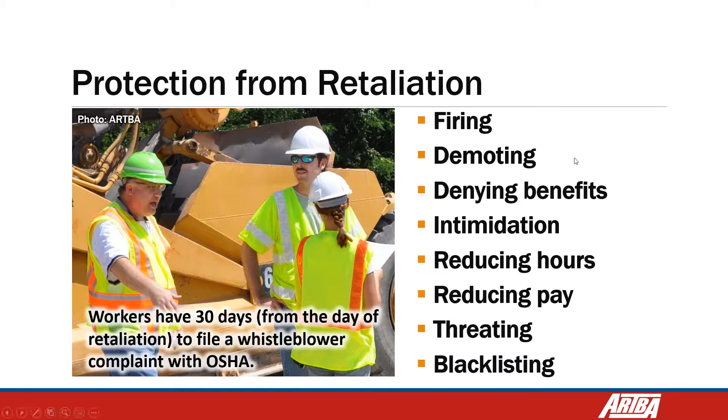Okay, so in general, we have 30 days after you know about the retaliation. Sometimes, for example, they reduce your paycheck, and you know about it just when you receive your paycheck. So you can say, hey, my 30 days begin from now, not from the first day of the month, but from the day you know about the retaliation. You have 30 days to go to OSHA and present a complaint.

How can you file a complaint? People can do it very easily now. We have all these electronic tools to do it. You can visit your nearest OSHA area office, but easier, you can go online and file a complaint online. So information is power.

When I am doing this class with workers, I ask them, hey, do you have a cell phone? Yes. Please browse 'OSHA complaint,' okay? They are going to find all the instructions on how to make a complaint before OSHA. So it is going to be much easier to go online.

They can get a form, fill it out, and fax it to your local area office. You can mail a letter to your local area office, or you can simply call OSHA. This is the way in which a lot of people are making complaints now, just making a phone call.

But workers need to be ready to provide all the information about the problem they are talking about. Inclusive, the OSHA inspectors are asking workers, did you talk with your company about this? Did you try to solve this problem with your company before? Because they don't have a lot of inspectors, and sometimes they say, look, we are going to visit your company around 3-4 weeks, and you are trying to have a solution immediately.

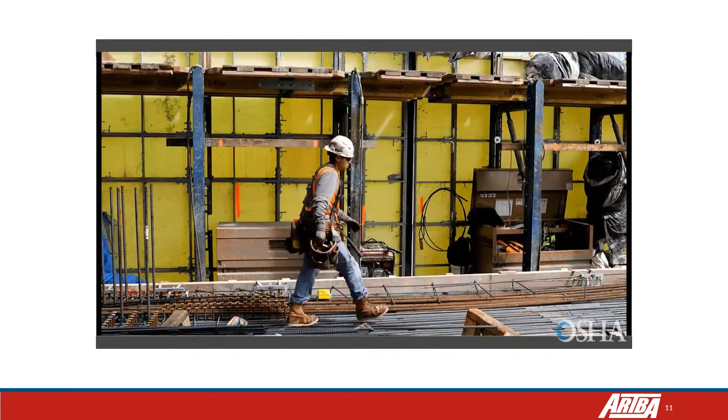A safe workplace benefits everyone. OSHA uses both enforcement and compliance assistance to achieve this shared goal. Ensuring compliance with OSHA standards is an integral part of the agency's mission to keep workers safe and healthy. That's why OSHA is working to give employers the knowledge and tools they need to comply with their obligations and provide safety information to workers. OSHA's on-site consultation program offers no cost and confidential assistance to small and medium-sized businesses.

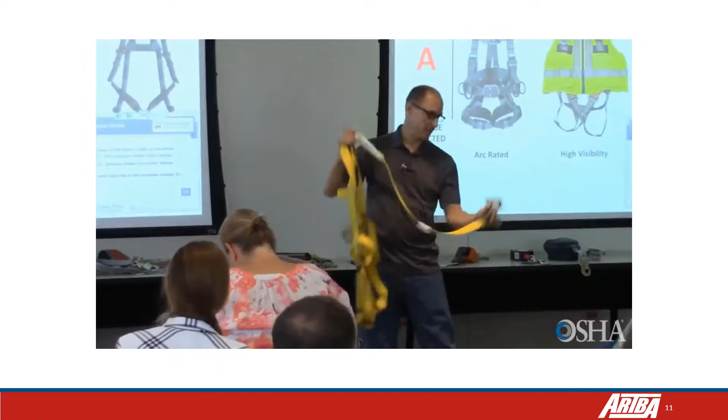The program helps businesses identify workplace hazards, provides advice for compliance with OSHA standards, and assists in establishing and improving safety and health programs. OSHA Training Institute education centers also offer training courses designed for workers, employers, and managers on safety and health hazard recognition and abatement at convenient locations nationwide.

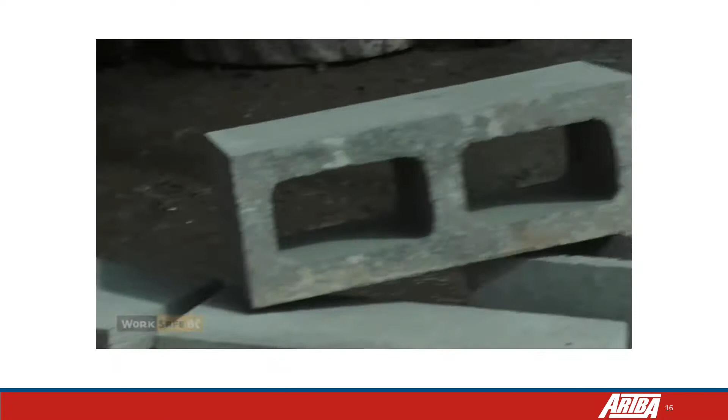Silica. It's one of the most common substances on Earth. It can be found in materials like sand and rock, and building products like concrete and brick. When a worker cuts, grinds, or drills materials that contain silica, dangerous crystalline silica dust is released into the air. As the worker breathes, silica crystals flow into his mouth and nose and down the air passages deep into the lungs.

The tiny crystals enter the small, fragile air sacs, where oxygen is absorbed into the blood. Immune system cells, called macrophages, engulf and try to dissolve the crystals, but they are unable to. Over time, more and more crystals build up inside the macrophage cells.

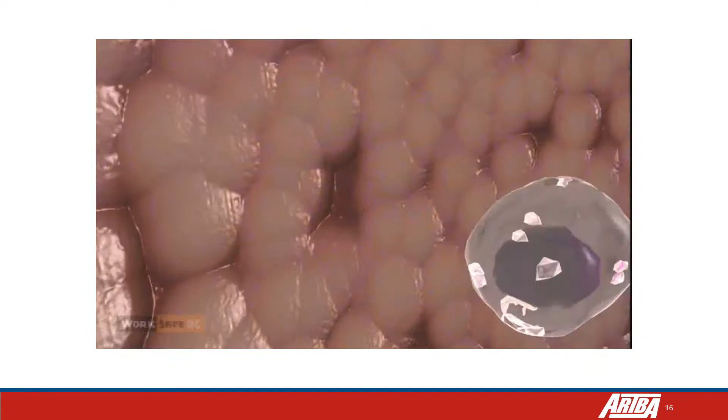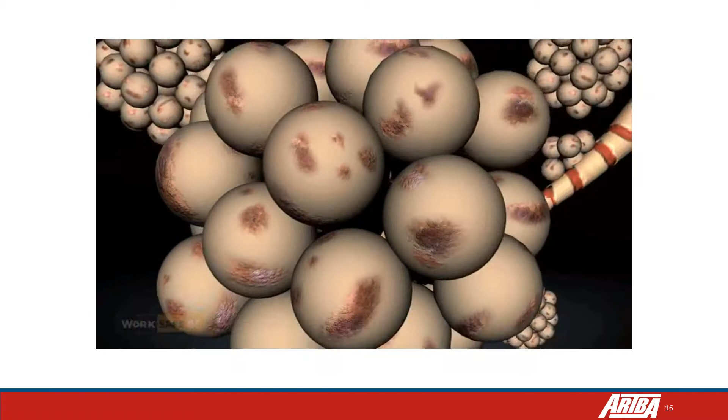The macrophages carry the silica into the walls of the lung, where they die. Scar tissue forms around the dead cells and spreads as more cells die. This damage can continue even after the exposure to silica stops. Eventually, so much scar tissue forms that the lungs can no longer function.

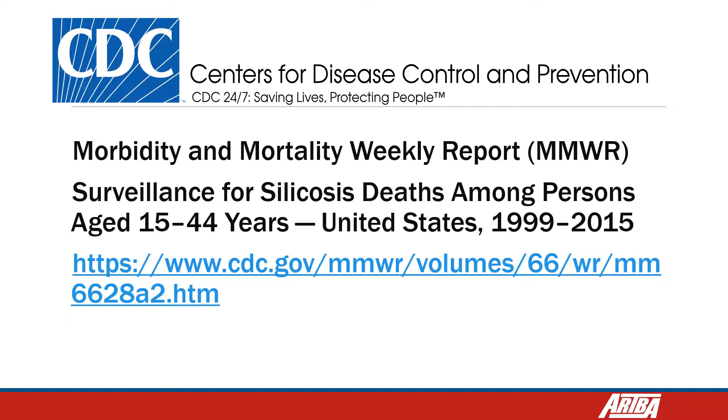So we are going to watch another video about the story of silica protection in general, and how we arrived at our current OSHA regulation. But it's interesting that people knew about the problems with silica for centuries, and we didn't have any specific norm or standard to protect our workers. Just in 2016, we got an effective standard making it mandatory to provide some protection that we are going to learn in this class, to prevent silica, silicosis, and all these illnesses related with silica. So this is the video I was talking about. It was produced, created by OSHA itself, but it's going to help us understand what was the process to create this current regulation.

Hello everybody. I'd like to describe a historic occupational health disaster that significantly affected workplace safety and health regulations. It's a story of silicosis at the Hawks Nest Tunnel near Gauley Bridge, West Virginia, in the late 1920s.

West Virginia is absolutely beautiful. Rolling mountains, fast-moving streams, and great windy back roads for motorcycling. But at the industrial level, the images are of chemical plants, coal mines, and mining disasters. But this story is not about chemicals or coal, but about workers drilling a 3-mile tunnel to expedite water flow for hydroelectric power.

Gauley Bridge is where two important rivers, the New River and the Gauley River, converge and become the Kanawha River, the lifeline of West Virginia. The Kanawha ultimately flows into the Ohio, Missouri, and finally the Mississippi, so it's an important transportation vehicle for coal and chemicals. Drilling a tunnel through Hawks Nest Mountain was especially dangerous due to its high crystalline silica levels. This, together with a poorly ventilated work area and no worker protection, produced a formula for disaster.

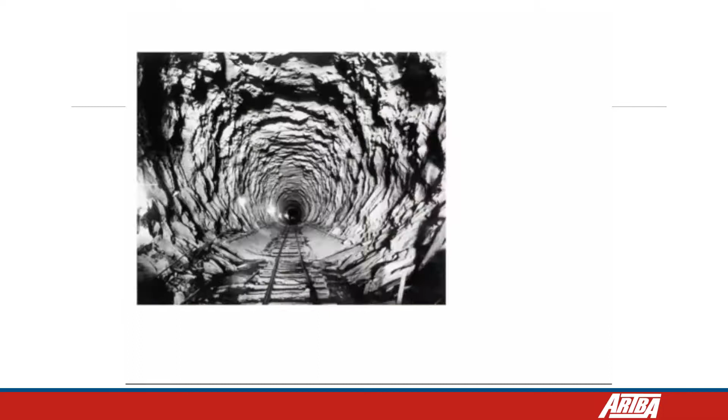You can imagine the high levels of dust in a tunnel like this. While many quote the number 476 that died, it's likely that hundreds more died years later. About 75% of the 1,500 miners recruited to drill the tunnel were African Americans, brought in from the Deep South as non-union workers. The workplace disaster at Gauley Bridge is especially poignant in African American history.

Of course, you know silica or silicon dioxide as sand. Approximately 12% of the Earth's crust is made of silica. So how can this be so toxic?

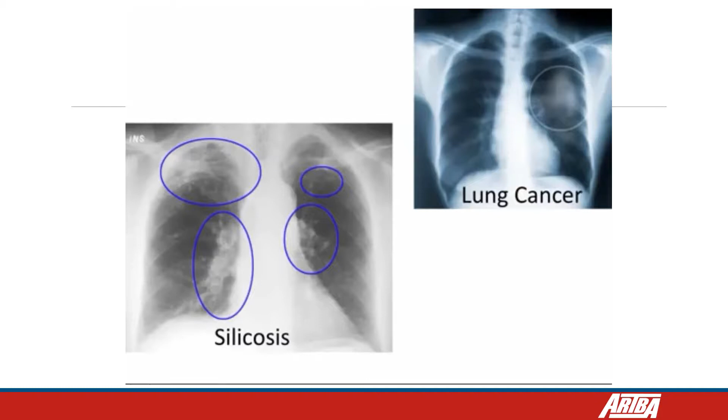Well, silica is complicated. Depending on how it was formed in nature, it can either be amorphous or crystalline. The toxic form of silica is crystalline silica. You probably heard of the most common form called quartz, but there are others, namely cristobalite and tridymite. These three are all associated with what's called silicosis, a fibrotic disease of the lung. However, crystalline silica is also a confirmed human carcinogen causing lung cancer.

Concrete is a mixture of sand, rock, and the binder of cement. There is often crystalline silica present. There may be some crystalline silica in the sand or rocks used for concrete, and when this is ground, chiseled, or drilled into, a fine dust will be generated.

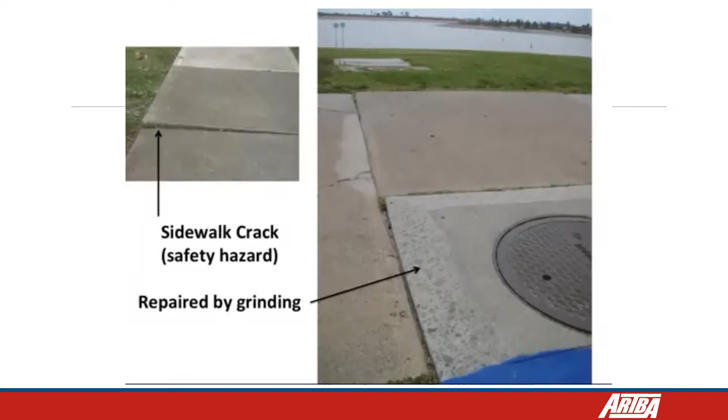What's common in many areas is grinding down sidewalks to remove a tripping hazard. I've seen many of these operations, and they all create large amounts of respirable dust. Wet methods or vacuums should be used to protect workers, but often a flimsy paper respirator is used, and sometimes nothing at all.

This is especially true of small-scale construction companies. Walk the streets in any city, and you'll see workers grinding, drilling, cutting concrete, granite, stone, or cinder blocks. This doesn't mean they're exposed to dangerous levels of crystalline silica. Exposure is a function of percent quartz in the stone or concrete and the particle size being generated, so while these images may seem risky, it's possible there is little or no crystalline silica in the air.

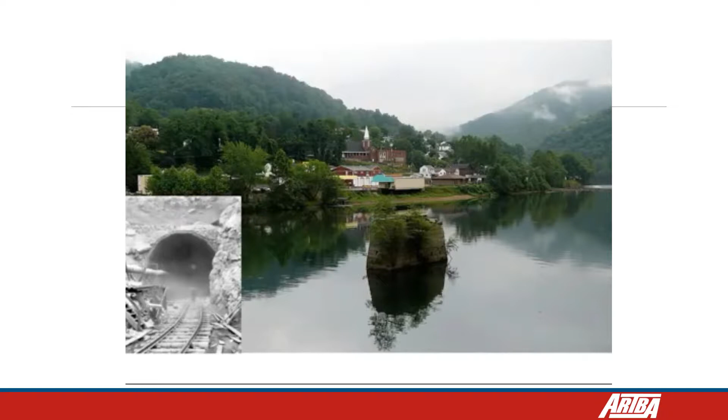But the workers at the Hawks Nest Tunnel near Gauley Bridge, West Virginia, weren't so lucky. They were drilling into very high quartz-containing rock and suffered the health effects. So when you're visiting beautiful West Virginia, stop by this area and visit the memorial for the hundreds of workers that perished in one of the most deadliest workplace poisonings in U.S. history. Thanks for listening, goodbye.

I'm going to... there is another video I want to show you. I'm going to show you later about the process of the creation of the law. But at this moment...

So it is real. People don't realize sometimes how bad this is, because the effect of the silicosis contamination, you can see it in 10 years, 15 years, and sometimes people cannot relate it with the job activity they were doing some years ago. So sometimes it's difficult to identify what is the cause of the silicosis, and you can find it difficult to create a legal case to prove that you were working in a place exposed to silica and these guys are responsible for your illness.

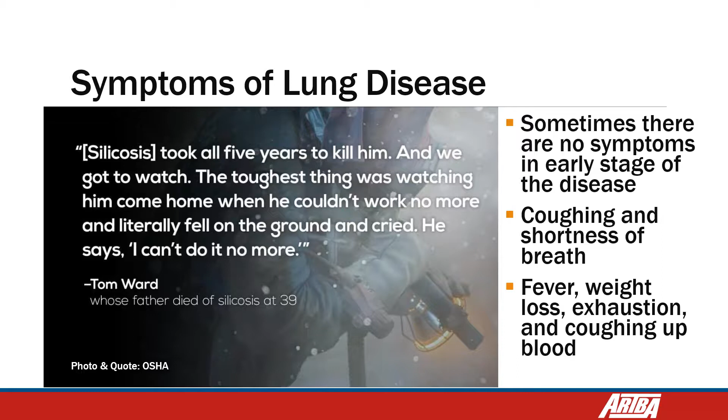But as I told you, in general, people cannot survive without an oxygen cylinder going everywhere with this oxygen. They cannot work, they cannot do anything because they don't have enough oxygen to move their body, and they are there waiting for that time to die, because it doesn't stop.

Silicosis continues growing and growing. Inclusive, after years you stop the exposure, you continue having silicosis and it continues affecting your body, and the scars continue expanding in your lungs.

It's calculated that over 500 construction workers are believed to die from exposure to silica dust every year. So we are talking about a big number, really, for construction in general. But the problem is that sometimes workers cannot identify where or what activity or when, or the company that didn't protect them, and they cannot make a legal claim.

It's difficult sometimes to identify where the contamination happened, or maybe the worker was working in several companies, in several construction companies, and it is difficult to say in which one you have the contamination, or maybe you have the contamination in all of them.

But now we have a rule that makes it mandatory for the employer to provide effective protection. If not, they can be subject to fines from OSHA. Actually this year, 2020, OSHA said that they were going to focus very much on silica protection. It happened before the COVID-19 pandemic we have now, but they have the plan to focus very, very much on silica protection.

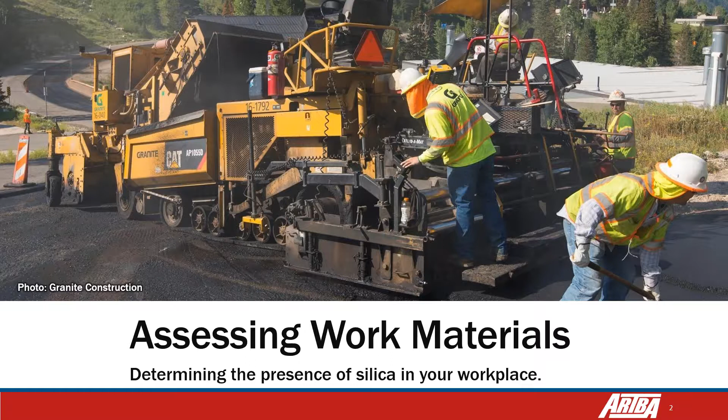So we are going to learn a little more about where we can find silica, and what materials we can find silica in, and what is the effect on our bodies. So OSHA has created this good video. This video is more about respiratory protection in general, but we need to apply the sections also for the silica protection plan.

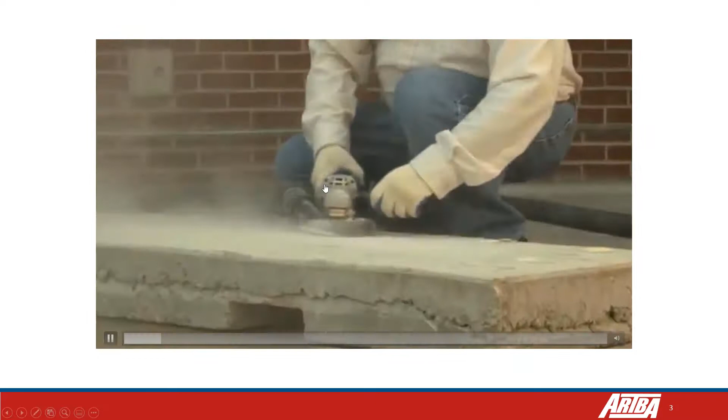Crystalline silica is one of Earth's most common minerals. It is found in stone, brick, rock, concrete, block, mortar, asphalt, and sand. Using power tools on these materials for tasks such as cutting or grinding can release tiny particles of silica into the air. These tiny particles are known as respirable crystalline silica. Workers who breathe in respirable crystalline silica can develop diseases that can be life-altering or deadly.

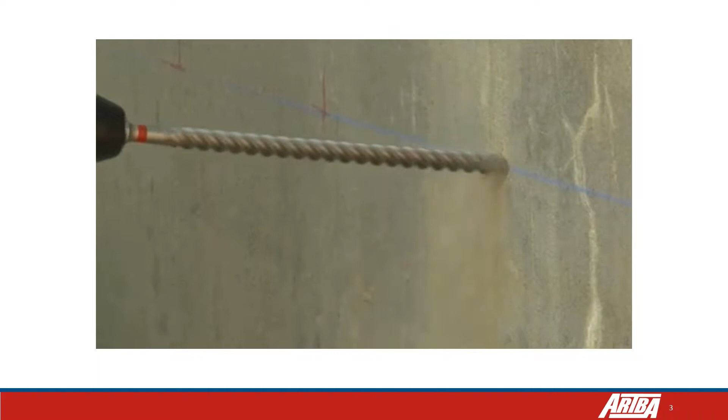Traditionally, on construction sites, silica from grinding and cutting produces a lot of dust to the workers' lungs. Exposure to respirable crystalline silica can cause silicosis, a disease that permanently scars the lungs. It can also cause lung cancer, kidney disease, or chronic obstructive pulmonary disease, also known as COPD. The chances of developing these diseases increase with higher and longer durations of exposure.

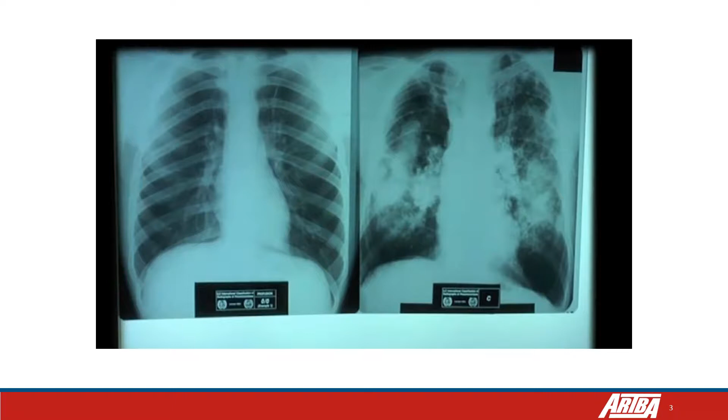What we're looking at on the left is a normal lung. You can see that the lung tissue on either side of the heart is dark and black, and that means it's full of air. On the X-ray on the right, you can see white scars throughout the lungs on both sides. That's all scar tissue, from a patient with advanced silicosis.

Without protection, workers exposed to very high levels of respirable crystalline silica during activities such as abrasive blasting with sand can develop silicosis within months to a few years. Workers usually do not develop signs of silicosis until after they have been exposed for 10 years or more. Once silicosis symptoms, such as shortness of breath, appear, they can get worse over time, even after the worker stops working with silica. Usually people who develop silicosis have been very healthy, vigorous people, and they find after years of the disease that they're short of breath, that they can't go very far, they can't walk very far, they can't climb the stairs. They may even be short of breath just sitting still.

I continue to see new cases of silicosis, and yet there is still no treatment. So I would like to see prevention of silicosis so that this disease is eliminated from our hospitals and our health clinics. Silica disease can be prevented by controlling exposure to silica dust.

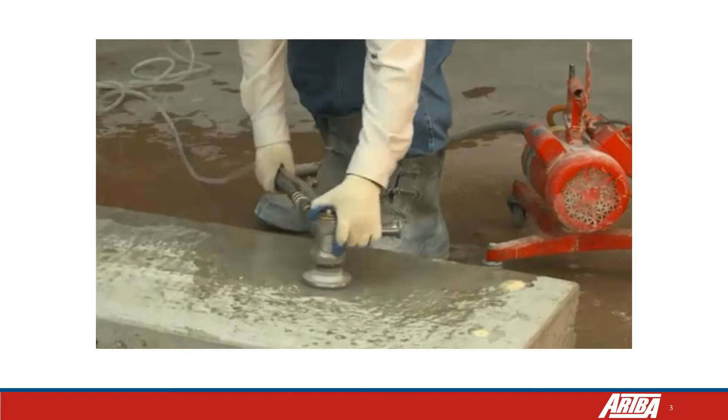Water can be used to wet the dust and prevent it from getting into the air. Vacuums can be used to remove the dust at the point where it is made. We stir up a lot of dust, so we try to prevent as much of it getting in the air as possible, so we use these vacuums. While we're working on cutting the joints out, we create a lot of dust, which we collect in the vacuum inside these bags. I'd much rather have it in this bag than I would inside my lungs.

Once I tried the new things, it worked well, because at the end of the day, I went home without silica dust in my lungs. I went home clean at the end of the day, and I got used to it.

Gary Stassy's family business is stone carving. His father and his grandfather both died of silicosis.

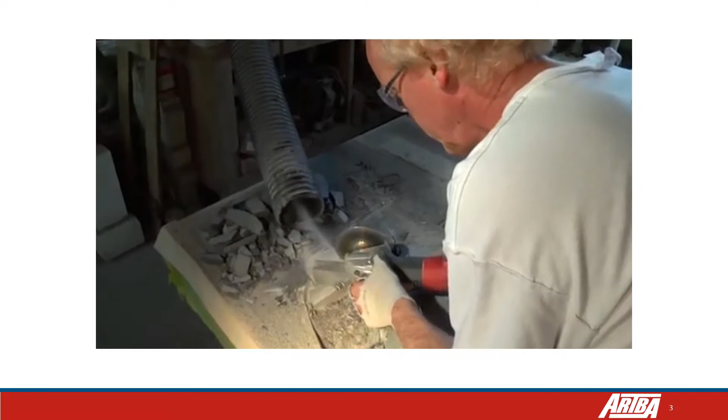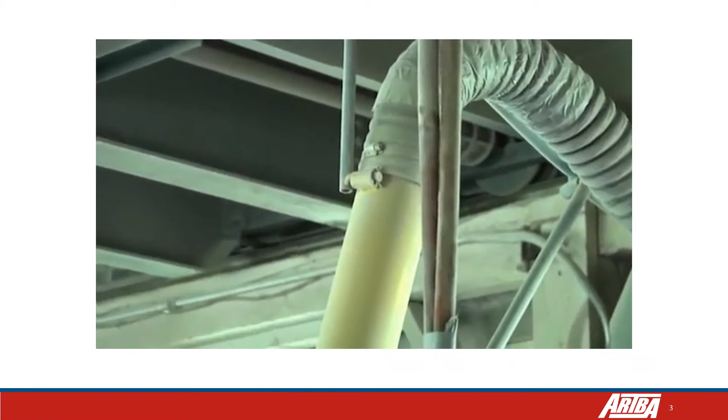I believe that our industry here has worked hard to bring in new technology that does help with the silicosis problem. I also believe that there's also room for more education for the workers themselves to understand the critical reasons why they have to be very careful in this industry.

In today's climate, we stress to our customers safety, financial stability, company stability. We remind our men we want them to go home in the same shape or better shape than when they showed up at work that morning. OSHA's rule for respirable crystalline silica requires employers to protect workers from silica dust to prevent them from developing disease. Silica-related diseases can be prevented if proper controls are used to reduce workers' exposure to dust.

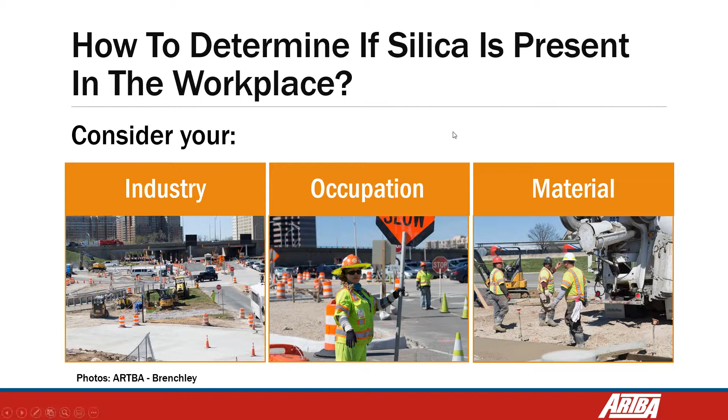So how are construction workers exposed to silica? If you do these activities, abrasive blasting, asphalt pavement manufacturing, remember pavement in general is 96% rock, only 4% is tar or bitumen.

Cement manufacturing, concrete mixing, concrete tunneling, road construction, demolition, tunneling operations, workers in general working in mountains, building a new highway or roadway. They usually have to open the area, not only for tunneling, but also in mountains, in areas where you have to cut rock. You are exposed to silica, jackhammer operations, masonry, and many more.

So respirable silica may be present. This dust is the problem. Sometimes people ask me, hey, is the sand hazardous for us? If I go to the beach, am I going to be contaminated with silica? The answer is no, because the grains of sand are gigantic, very big compared with the silica dust.

The silica dust is microscopic. You cannot see a particle of silica dust, but you can see all the dust floating in the air. This is silica. So sand cannot float in the air, but the dust that is floating in the air, if you start crushing sand, you can produce crystalline silica by crushing or doing activities like abrasive blasting, asphalt, cement, concrete, tunneling, road construction. If you're drilling, using a jackhammer, crushing rock, or using a saw to cut pavement or concrete, you are producing silica at that moment.

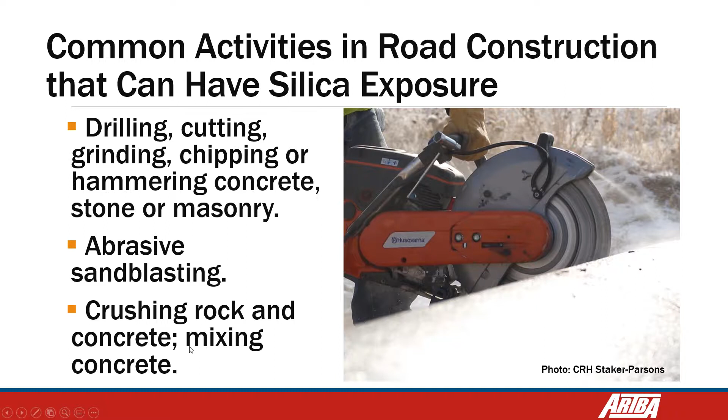So common activities in road construction that can have silica exposure: drilling, cutting, grinding, chipping, or hammering concrete, stone, or masonry, using abrasive sandblasting, crushing rock and concrete, mixing concrete. We are producing dust, and we don't want to breathe this dust. We want to prevent people from breathing this dust.

So common activities in roadway construction that can have silica exposure: loading, dumping, and hauling rock and concrete. You have this dust. If you can see the dust floating in the air, that's the problem. Again, tunneling operations, milling concrete and asphalt, dry sweeping, or using compressed air to move dust, sand, or rock.

The other day, somebody was asking me, hey, we are going to sweep or clean the area from dust. Is it something that is prohibited by OSHA? And yes, it is prohibited by OSHA. OSHA doesn't want to see dust floating in a roadway or any construction area, because most of this floating dust is silica. So they want us to use other methods to control it.

In the video that we watched previously, we saw two methods: just using spray water to contain the dust on the soil, or using a vacuum to absorb all the dust. But the idea, the objective, the goal, is to prevent this dust from floating in the air, from becoming airborne. So it also depends on the occupation.

What do you do? Workers that have these occupations are at risk of silica exposure: construction laborer, road construction, transportation, homes, etc., crushing and grinding machine operator, mining machine operator, rock driller, sandblaster, material moving equipment operator.

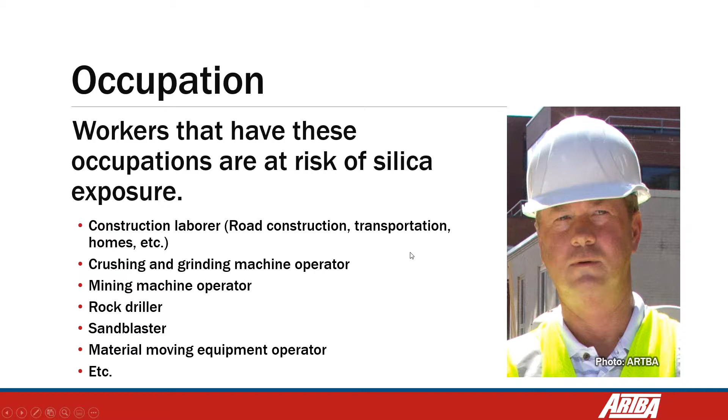So these occupations are exposed to silica, but we need to think about the other people around these workers. Okay, these guys can be working directly with silica, maybe they have all the personal protection equipment, but what about the other workers who are working around them, who are not protected, who can breathe all this dust?

Other examples of materials containing silica: asphalt, rock, stone, tile, brick, sand. Practically everything that is not wood, plastic, or metal has silica. That's my final conclusion about it. Almost everything is silica, except wood, except plastic, except metal parts.

So ways to determine if a material contains silica: check the label. There is an obligation for the manufacturer to provide a label indicating if there is silica inside a product. Check the safety data sheet. There is an obligation for the manufacturer or person selling these materials to give us a safety data sheet. We're going to talk more about it. Review the published data to know what materials have silica and what percentage of silica is in a material, and send some samples to the lab to be analyzed.

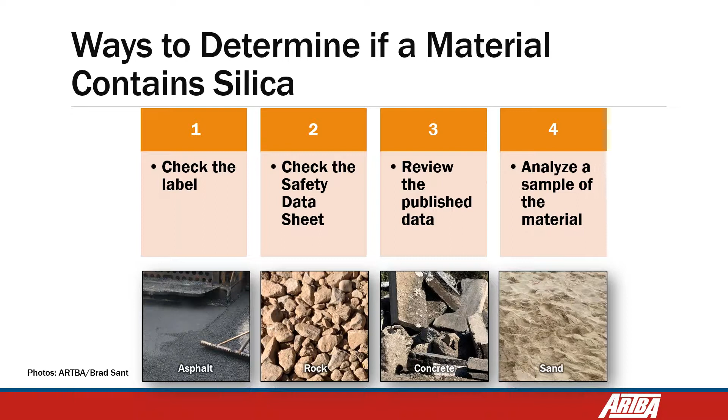So these are the ways to determine, at the end, not only if a material has silica, but what percentage of silica you can find in some construction materials.

There may be materials and tasks where silica is present. However, exposure is anticipated to be below the action level of 25 micrograms per cubic meter of air. This is interesting, because OSHA says you have to start doing an analysis of the environment. If it has more than 25 micrograms per cubic meter of air of silica, you need to follow the law and protect your workers. If it is less than 25 micrograms, you are okay—you don't need to follow any plan or do anything, because you don't have enough silica in your environment.

We are going to talk a little more about it. Some examples of these activities: mixing concrete for post holes.

We don't produce a lot of dust, practically nothing, when pouring concrete footers, slab foundations, and foundation walls, and removing concrete formwork. We cannot see any dust when we do these activities, and they are considered to be below 25 micrograms, also called the action level. The technical name of this 25 micrograms per cubic meter of air is the action level.

So there is a potential for danger when crystalline silica particles are in the air. It is important to know that there may be silica particles in the air even though you don't see any dust. So it is possible to have silica. The main indicator is if you can see the dust airborne in the air, you have silica there.

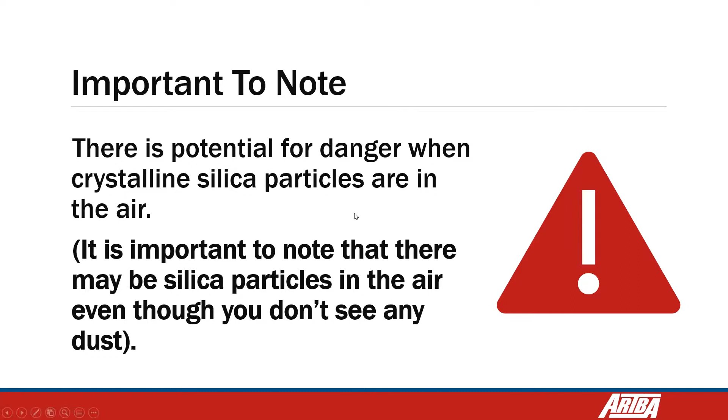So we were talking about where we can find silica, and we need to follow the Globally Harmonized System. Some years ago, the U.S. subscribed to an international agreement to share the same way in which we register all the information about our labels and our material, what we used to call material safety data sheet, now just safety data sheet. So we agree with other countries to have this labeling system in which we are using pictograms and providing the information.

So it is the manufacturer's responsibility to attach a label to all products that contain more than 0.1% of silica that may be hazardous when used. If you have more than this level, you have to provide this information to the workers. The responsibility of the employer is to ensure that the label is not removed or defaced. The idea is also to train your workers about how to identify what materials have silica and what activities can produce silica too.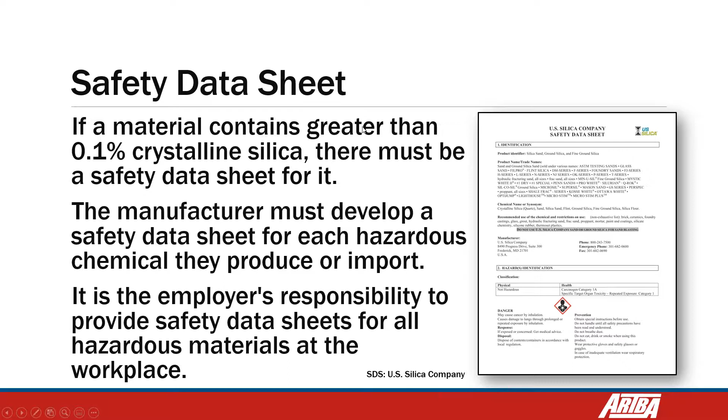So the manufacturers need to give you a safety data sheet. We used to call it material safety data sheet some years ago; now it's just safety data sheet. The important thing is that there is now a mandatory order for every manufacturer to follow, because before we had this Globally Harmonized System about chemicals, manufacturers could create a material safety data sheet and put information in whatever order they wanted. Now it's mandatory, because it's easier for everybody to understand a safety data sheet, with information about the risk of exposure to some materials, and what to do if there is...

...a spillage of some materials, some chemicals, how to clean them. Sometimes we don't have this information on the label because the label is small, but we have the safety data sheet, which may be 8-10 pages giving us information about the chemical inside, what to do in case of exposure, how to prevent exposure, or what requirements we need to follow to prevent exposure. So this information is also provided by the manufacturer.

It's mandatory: if you have more than 0.1% silica in a product, the manufacturer has the obligation to give you that level and also the safety data sheet. Okay, then how else can we find silica? Review the published data.

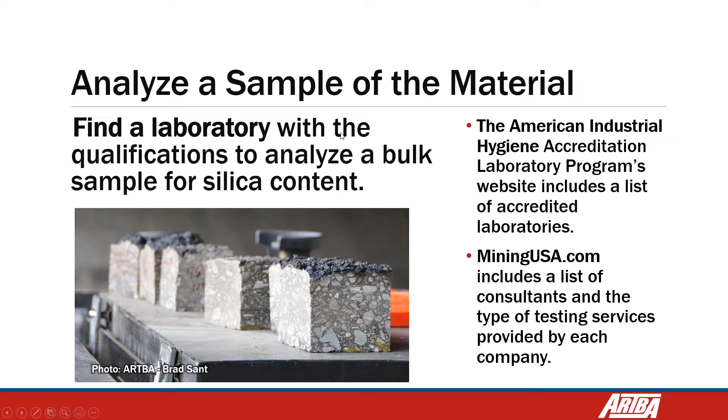So it's important to analyze these materials to know what kind of materials you are working with. These are some questions we can ask the laboratory to know if they are going to work well with you and your samples.

Does your company participate in the American Industrial Hygiene Association Industrial Hygiene Laboratory Accreditation Program? Does your company have experience working with construction contractors? Who will collect the samples—sometimes the company, sometimes you have to collect them yourself. What is the cost of conducting a sample, and what does it cover?

Are you equipped to analyze bulk samples of materials for their silica content? If yes, how much experience does your staff have analyzing crystalline silica? What sampling methods does your laboratory use? Does this method comply with accepted government requirements? If yes, which ones? Will I receive a written report? Will there be a non-technical explanation?

These questions are important, especially about the non-technical explanation, because sometimes you can receive a written report but cannot read it because you don't have the technical knowledge to understand it.

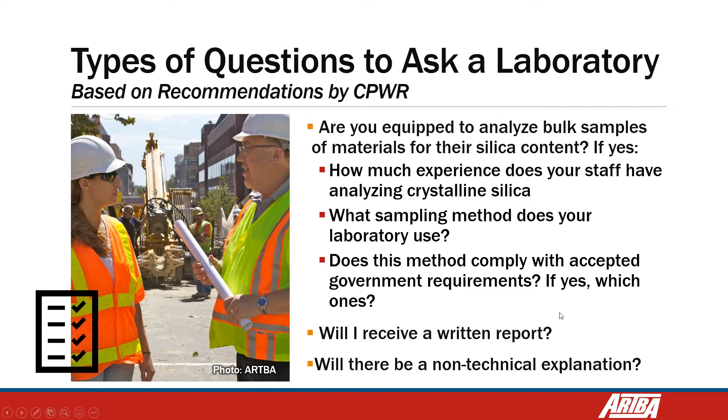Sometimes you go to a lab to take a blood test and receive a paper with some information, but you're not a doctor to understand it. It's similar to this case. So it's important to get some non-technical explanation to know how much silica we have, and if possible, what methods are recommended to control silica exposure when working with these materials.

Some additional silica resources - this is interesting. You can visit the CPWR web page. They have very good materials about silica, including software where you can complete answers and it automatically creates a silica protection plan, or you can find additional information about materials and what percentage of silica they have.

We are also going to talk about Table 1. In Table 1, you'll find 18 different activities that can produce silica and how to protect yourself. But there are many other activities not included in Table 1. CPWR has additional information on its web page about other activities not in Table 1, and what you can do to prevent silica exposure for your workers. So not everything is in Table 1 - it just covers the most frequent activities producing silica. For additional activities, go to CPWR.

So how can we control workers' exposure to silica? Now it's important - if you have Table 1, I recommend everybody print it, because it's going to give us practical solutions to fulfill the law and be sure we won't get any fine from OSHA if we have an inspection. Table 1 is very important, but we're going to learn all the methods Table 1 recommends to prevent exposure to silica.

And we're going to start with this hierarchy of controls - a universal tool OSHA created to control any hazard. OSHA recommends that when starting any project, you begin with a hazard analysis: go to the place and identify all the hazards you can find. Maybe you'll work near power lines, so you have electrocution hazards. Maybe you'll do excavation and trenching, so you have caving hazards, or you're working at high altitude, so you need fall protection. So you identify all your hazards, then think about how to control them and keep your people safe.

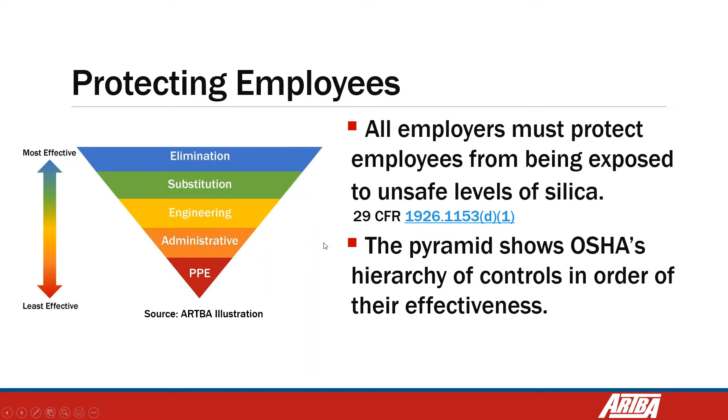So what engineer controls can we have from OSHA in table 1? They give us 3 different control methods: using wet methods, spraying water to prevent the airborne dust of silica; using vacuum dust control systems, an aspirator, a vacuum absorbing all the dust; or isolation. So we have these 3 alternatives in table 1.

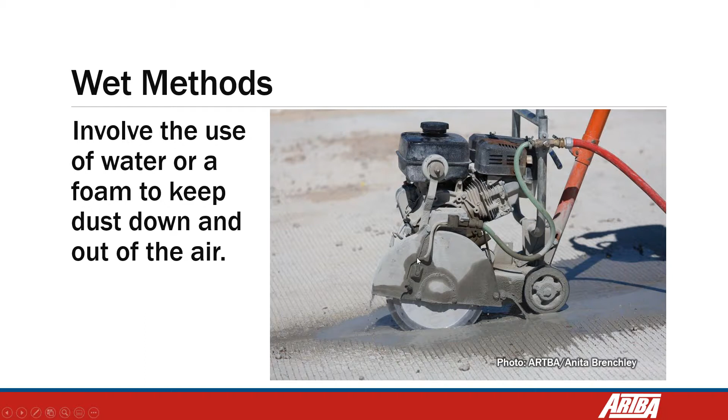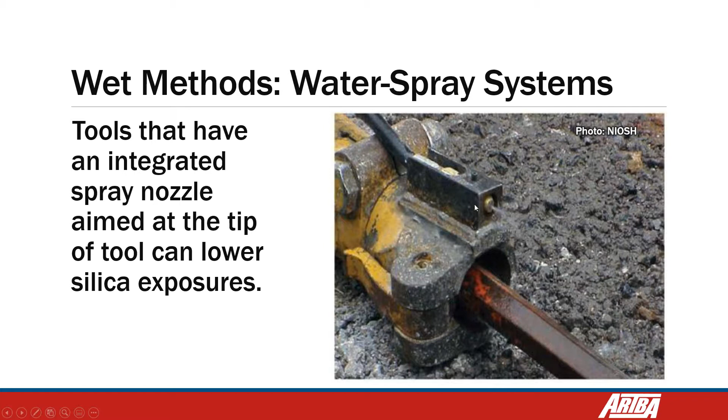So wet methods, water spray systems, tools that have an integrated spray nozzle aimed at the tip of the tool, can lower silica exposure. You can see here this jackhammer is attached to a system in which they provide water spraying to the point of contact. So it's something that is going to help us to prevent silica contamination.

But there is another problem when we are using water: what are we going to do with all this slurry formed as a result of using water? The idea here is we don't want this slurry, because when it dries, it is dust again. And if somebody is walking in the area, a machine is passing through the area, or somebody is sweeping the area, all this dust is going to become airborne again, and we don't want it. So OSHA is asking us to control and process this slurry and prevent it from drying and becoming airborne.

So we are going to watch a video here about this engineer control method applied to tasks. They're going to focus very much on this spray water method.

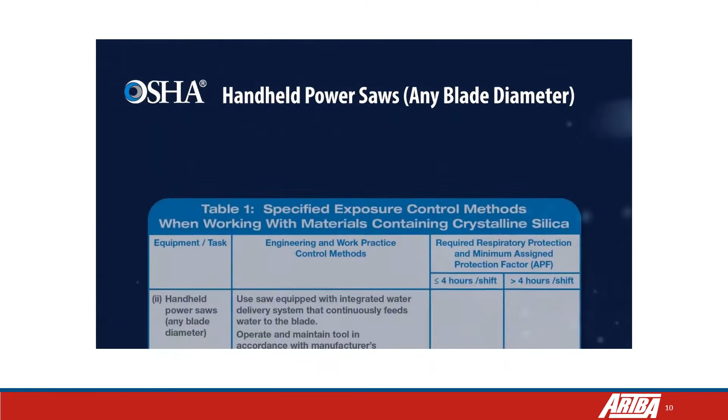The Occupational Safety and Health Administration requires employers to limit workers' exposure to respirable crystalline silica on the job. This is one of a series of videos showing dust control methods that OSHA specifies for many common construction tasks.

In Table 1 there are 18 different activities. One of these activities is handheld power saw. This video explains how to comply with the law using Table 1, including when workers need to use a mask. It's an example of applying Table 1 to the work zone, especially when working with power saws, under the respirable crystalline silica standard for construction.

When used properly, these methods are effective in limiting workers' exposure to respirable crystalline silica dust. This video describes how to fully and properly use an integrated water delivery system to control dust when using a handheld power saw to cut materials that contain crystalline silica.

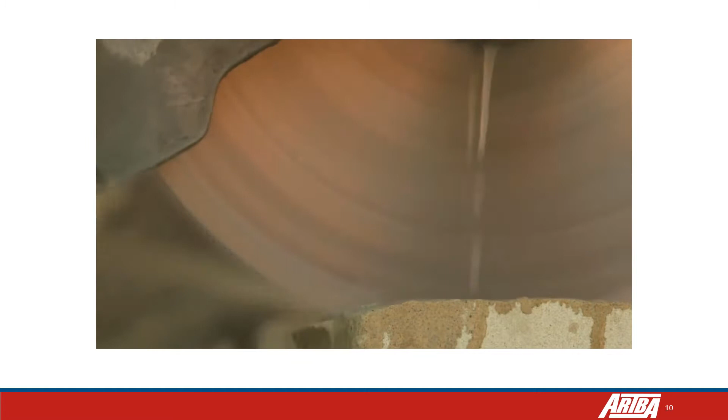Many handheld power saws have a built-in water delivery system that applies water to the saw blade. The water reduces wear of the blade and prevents it from overheating, and can also effectively control dust when cutting material containing crystalline silica. To comply with Table 1, the water delivery system must be integrated with the saw and must continuously feed water to the blade. An integrated water delivery system is one supplied by the equipment manufacturer and developed to be used with the specific make and model of the tool.

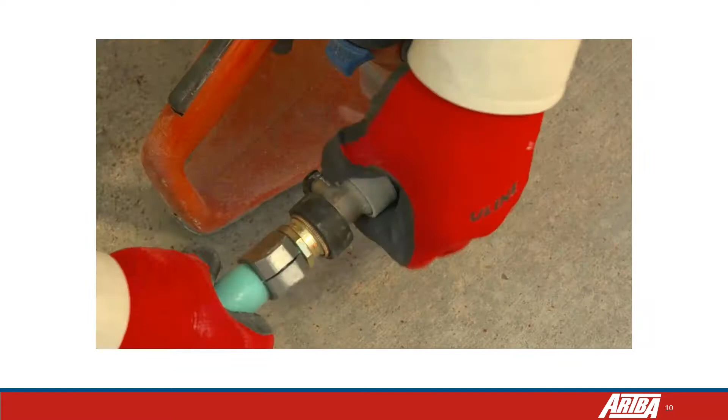An integrated water delivery system for a handheld power saw typically consists of a water source, connectors, hose, and nozzle. The water source can be a pressurized tank or a hose connected to a faucet. Some handheld power saws have an integrated water pump.

It's important to correctly operate and maintain the water delivery system. When the water delivery system is not working properly, dust is not effectively controlled. With regular use, debris can clog the pump, hoses can become pinched, and hose connections may fail.

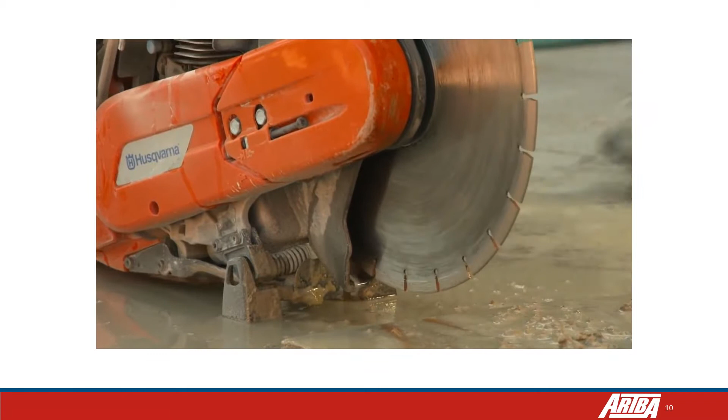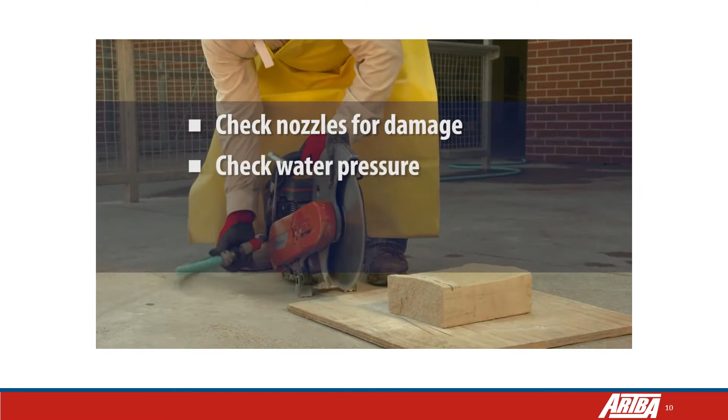When applying water to the blade, the operator should make sure the amount of water is sufficient to minimize release of visible dust. To ensure a continuous stream of water reaches the blade, the saw operator should regularly check nozzles for damage, check water pressure, remove any clogs, and ensure hoses and connections are intact and working correctly. When using a portable water supply, the operator should make sure, before starting to cut, that enough water is available to apply a steady stream to the blade while cutting.

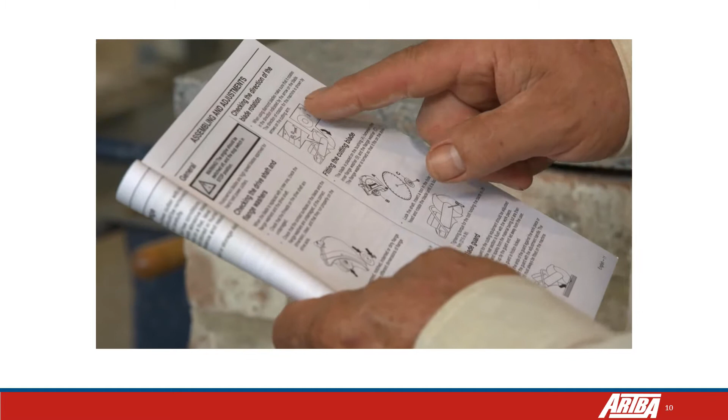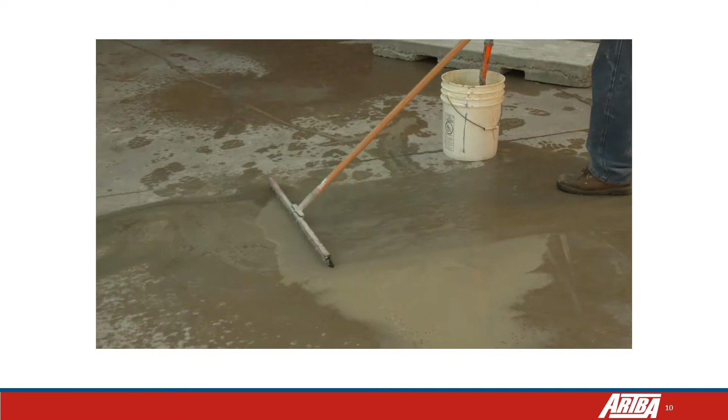The saw must also be operated and maintained according to the manufacturer's instructions to minimize dust emissions. Instructions often specify the type and diameter of the blade, the recommended amount of water to apply, procedures for checking the blade for wear or damage, and a maintenance schedule. Any slurry produced should be cleaned up to prevent it from drying and releasing silica dust into the air.

As long as the integrated water delivery system is fully and properly implemented on the handheld power saw and the task is performed outdoors for 4 hours or less during a shift, the saw operator and workers assisting are not required to wear respirators. If the task is performed outdoors for more than 4 hours, or indoors, or in an enclosed area for any length of time, the saw operator and assisting workers must use respirators with an assigned protection factor of at least 10.

When respirators are required, they must be put on before beginning the task and worn the entire time the task is performed. When respirators are used, the employer must comply with OSHA's respiratory protection standard.

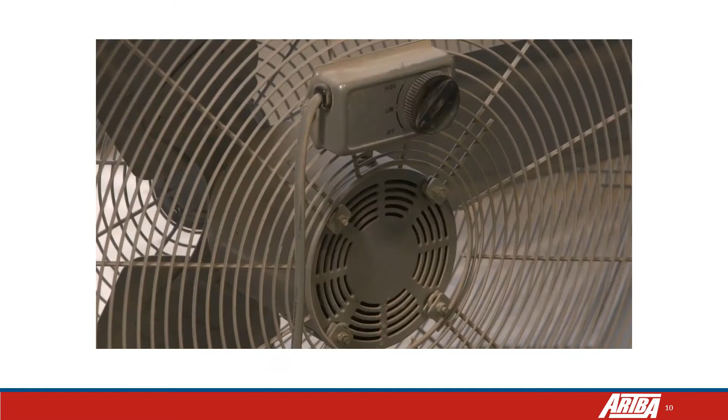Using a handheld power saw indoors or in an enclosed area requires an exhaust method, such as a portable fan, as needed to minimize the accumulation of visible airborne dust. Be sure that any exhaust method chosen moves airborne dust away from workers and does not block an exit route.

Employers who fully and properly implement the dust control methods specified by OSHA in Table 1 are not required to measure the saw operator's exposure to respirable crystalline silica or the exposure of other workers assisting with the task.

The respirable crystalline silica standard for construction also includes additional requirements to protect workers exposed to respirable crystalline silica. Many of these requirements apply whether employers are using a dust control method specified by OSHA in Table 1 or an alternative dust control method.

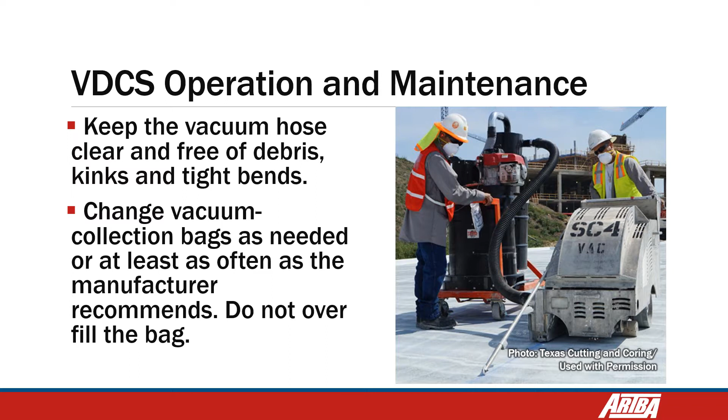So OSHA gives us some recommendations about how to do these procedures: set a regular schedule for maintenance and filter cleaning of the vacuums. Avoid exposure to dust when changing vacuum bags and cleaning or replacing air filters. Place filters into sealed bags to prevent releasing silica dust. Change, discard, or clean filters per manufacturer recommendation.

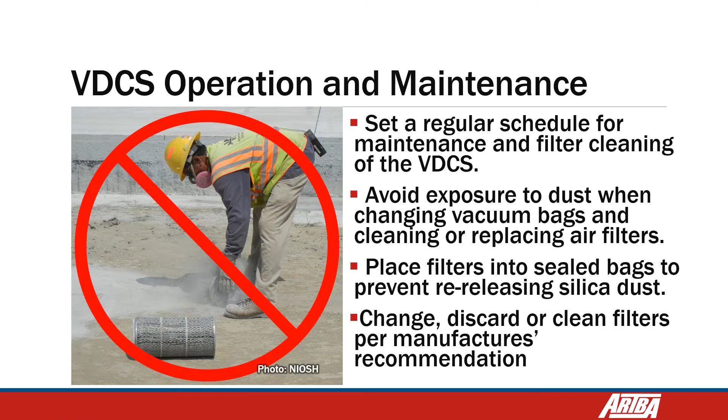So the point is, if we are cleaning or manipulating the bags or filters, we have to do it inside a bag. Put it inside the bag and clean it in a way that all the dust is contained inside the bag, because we don't want it dispersed in the air.

How to dispose of the dust collected in the filters and vacuums: slurry generated by wet methods should be cleaned up before it dries, using a wet vacuum. When emptying the vacuum, the slurry is transferred into a plastic bag and placed inside a container for disposal. The container is sealed to prevent the release of dust back into the workspace. Never sweep or use compressed air on dried slurry. If the slurry dries, immediately wet it down and clean it up with the wet vacuum.

The idea is OSHA doesn't want any dust airborne. So we have to prevent this, whatever we are doing. We have to follow some methods to prevent this silica dust from becoming airborne, otherwise it's an OSHA violation.

I have here a video in which we are going to learn more about vacuums, the engineering vacuum control system. This one is again used in Table 1. They select one activity in Table 1, and they use and follow the instructions in Table 1.

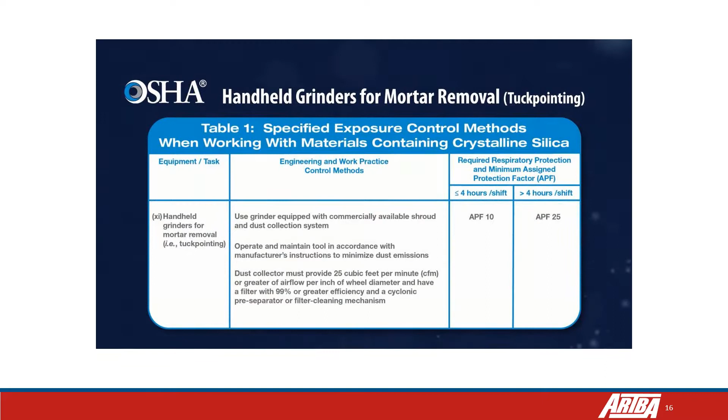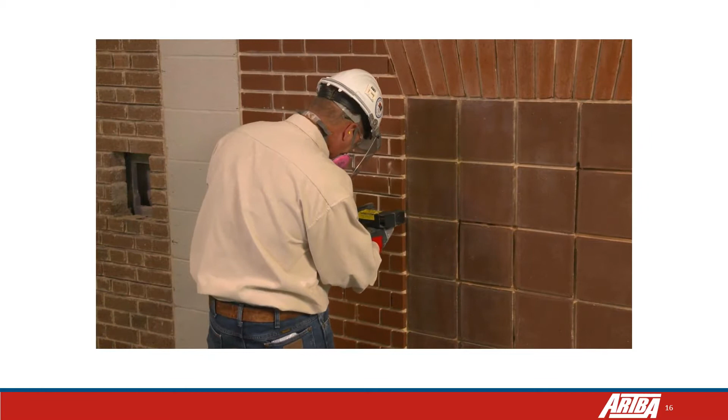The Occupational Safety and Health Administration requires employers to limit workers' exposure to respirable crystalline silica on the job. This is one of a series of videos showing dust control methods that OSHA specifies for many common construction tasks in Table 1 of the Respirable Crystalline Silica Standard for construction. When used properly, these methods are effective in limiting workers' exposure to respirable crystalline silica dust. This video describes how to fully and properly use a commercially available shroud and a dust collection system to control dust when using a handheld grinder to remove mortar that contains crystalline silica. The process of removing and replacing mortar is commonly called tuck pointing.

A shroud and dust collection system can control dust created by handheld grinders used for tuck pointing. Commercially produced shrouds and dust collection systems are readily available for use with handheld grinders.

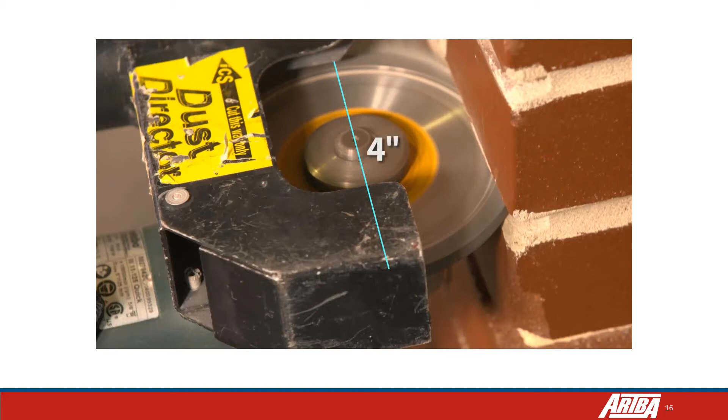To comply with Table 1, the dust collector must provide a minimum airflow of 25 cubic feet per minute for each inch of wheel diameter. For example, if a grinding wheel is 4 inches in diameter, then the dust collector must provide at least 100 cubic feet of airflow per minute.

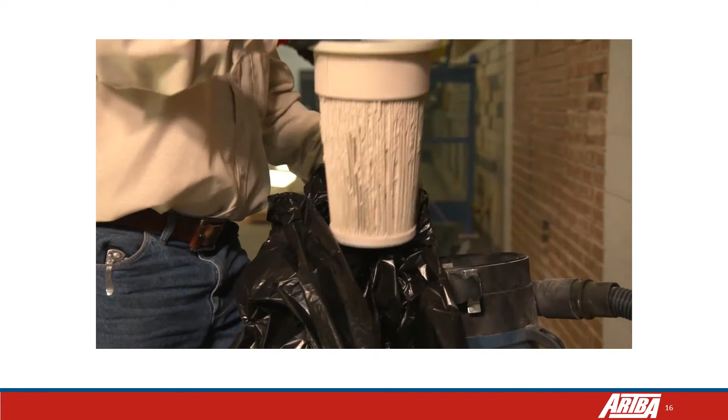The dust collector must also have a filter with 99% or greater efficiency and a cyclonic pre-separator or filter cleaning mechanism. Cyclonic pre-separators and filter cleaning mechanisms prevent debris from building up on the filter. This allows more time between filter changes and helps maintain the proper amount of airflow through the dust collection system. It's important to correctly maintain the dust collection system.

When the dust collection system is not working properly, dust is not effectively controlled. With regular use, the shroud can become excessively worn. Vacuum hoses can become clogged, filters can become overloaded, and dust collection bags will fill up. To help ensure the system is working correctly, the shroud must be intact and installed according to the manufacturer's instructions. The grinder must also be operated and maintained in accordance with the manufacturer's instructions to minimize dust emissions.

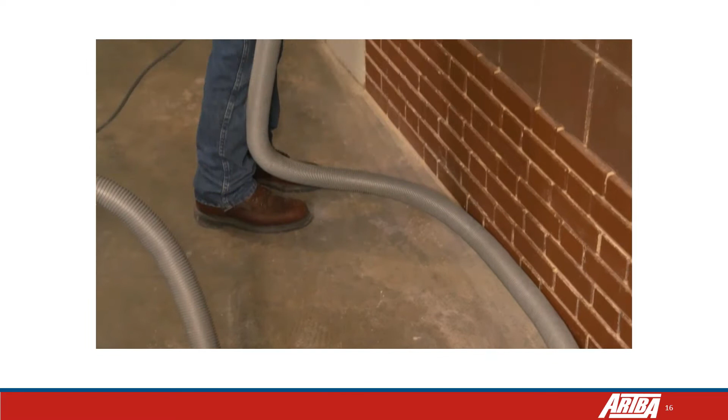Instructions often direct users to regularly check the dust collection system for signs of damage. Make sure the hose connecting the tool to the vacuum is intact and without kinks or tight bends that can reduce airflow and dust collection. Clean and replace filters as needed, not overfill the waste container, and follow a specified maintenance schedule.

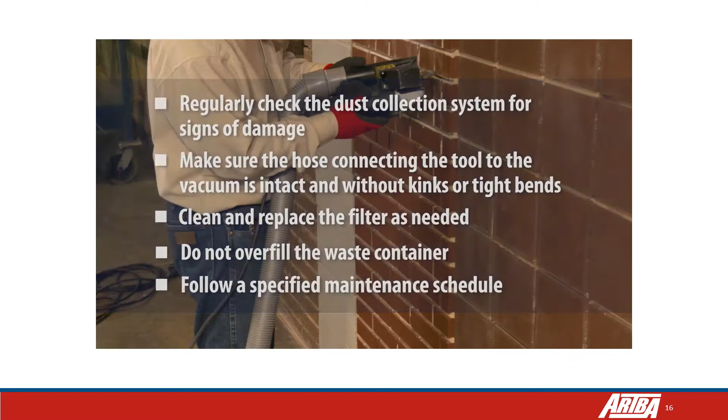Be sure used filters and dust collection bags are handled in a manner that will minimize workers' exposure to silica dust. If the task is performed for 4 hours or less during a shift, the tool operator and workers assisting the operator must use respirators with an assigned protection factor of at least 10. If the task is performed for more than 4 hours, the tool operator and workers assisting the operator must use respirators with an assigned protection factor of at least 25.

The appropriate respirator must be put on before beginning the task and must be worn the entire time the task is performed. Employers who perform tuck pointing must comply with OSHA's respiratory protection standard.

Using a handheld grinder for tuck pointing indoors or in an enclosed area requires an exhaust method, such as a portable fan, as needed to minimize the accumulation of visible airborne dust. Be sure that any exhaust method chosen moves airborne dust away from workers and does not block an exit route.

Employers who fully and properly implement the dust control methods specified in Table 1 are not required to measure the tool operator's exposure to respirable crystalline silica or the exposure of other workers assisting with the task.

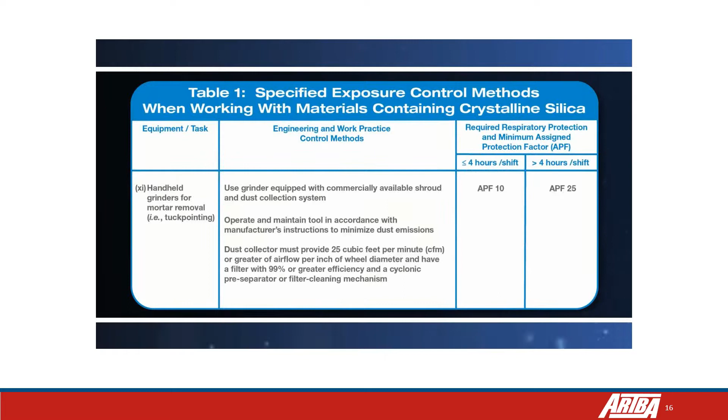The respirable crystalline silica standard for construction also includes additional requirements to protect workers exposed to respirable crystalline silica. Many of these requirements apply whether employers are using a dust control method specified by OSHA in Table 1 or an alternative dust control method.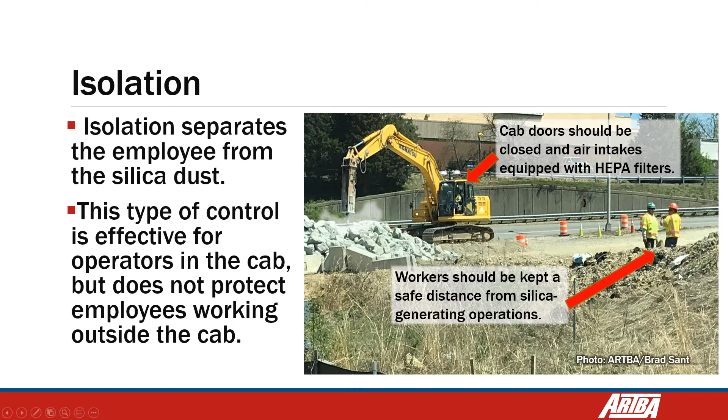And also protect other workers, preventing them, maybe using an administrative method, creating a sort of warning sign around and only allowing authorized personnel to go inside of this area. So what administrative control methods can we use to protect our workers?

So we covered this area, engineering. Now we are going to talk about administrative control methods, and we have some control methods. For example, we were talking about limiting access to workers in some areas, using some warning signs, preventing workers from going inside an area in which we are going to produce a lot of crystalline silica dust.

Rotation of workers. If you read table 1, you are going to realize there are some activities in which workers don't need to use a mask if they are working, but if they are working more than 4 hours, they have to. So in some cases, the employer can say we're going to rotate our workers every 3 hours in a way in which they don't need to use masks at any time.

There is something interesting about this rotation of workers. We have this new directive. I attached this new directive to your materials. This directive was published in June of this year, and they have a recommendation about this rotation of workers. The limit is 4 hours, okay?

In some cases, you don't need to use a mask. But if you as employer are asking your workers to rotate at 3 hours and 59 minutes, for example, because you don't want to provide masks to your workers, OSHA doesn't like this idea, and they recommend everybody have a sort of objective to protect our workers, not only to fulfill the law. It is possible you can go to that limit, but OSHA doesn't recommend it, and they are not going to like it if you go to the limit.

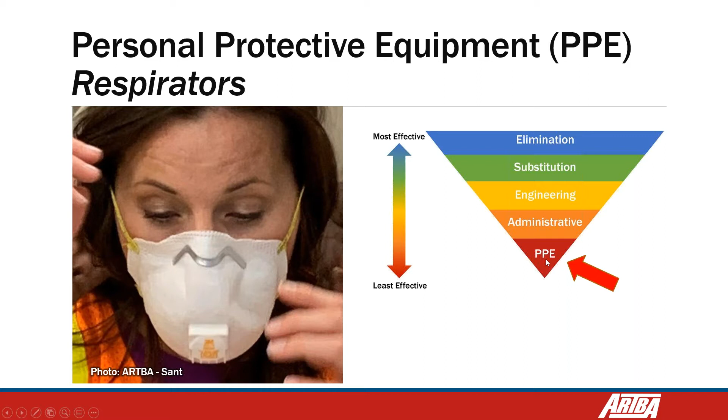We have a sort of activity here to review all these methods that we can use to protect our workers. For example, elimination, we can remove the hazard.

Sometimes if we decide to build the building using other materials, that materials not having silica inside, replace the hazard. Sometimes we can use some tools that allow us to have this connection with the spray or water or the dust collector or vacuum. And sometimes these tools like a jackhammer or saw can be more expensive, but it is going to allow us to protect our workers and prevent us from producing this silica dust.

Then engineer, isolate people from the hazard, is another method, but we have other methods too, using water, spraying water or a vacuum. Isolating people from the hazard is an engineering method.

Administrative control, change work practices. Okay, so we were talking about rotation of workers, training our workers, limiting access to some areas using administrative methods like signs, for example, and the PPE, the personal protective equipment.

What kind of PPE do we need to use? We are going to learn from table 1 also what kind of PPE we need to use in some circumstances.

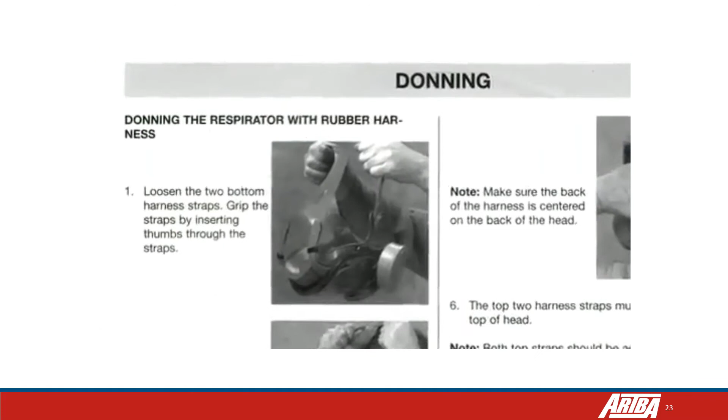Respirator manufacturers supply instructions on how to properly don and doff, put on and take off, each respirator they produce. The manufacturer also supplies instructions on how to properly conduct a user seal check.

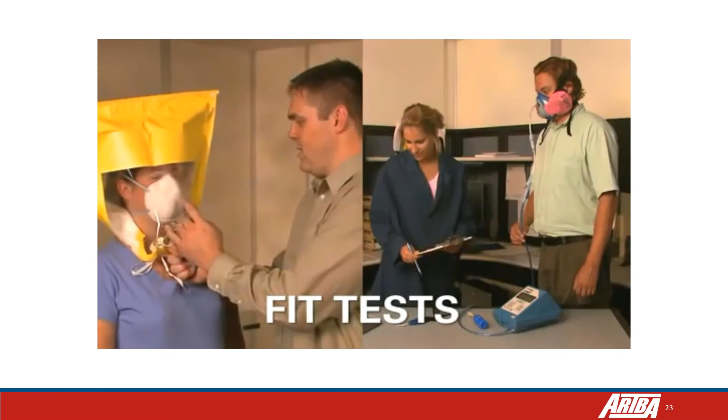A user seal check is a way to verify that the respirator has been properly positioned on your face to assure a proper seal. Sometimes workers confuse the term user seal check with fit test, which is different. A user seal check is not a substitute for a fit test, which is a more involved process that uses a test agent or instrument to verify the respirator's fit. A fit test must be performed before you wear a respirator for the first time and at least annually thereafter.

A user seal check must be performed each time you put on a respirator to check that it has been donned correctly. Remember, always follow the respirator manufacturer's instructions for the specific respirator model that you are using.

Here are some general instructions for properly donning and doffing and properly conducting a user seal check for the two most common types of respirators. Let's begin with a disposable filtering facepiece respirator, often referred to as an N95 or a dust mask. Inspect the respirator, including the straps, for tears or damage.

If you find any damage to the respirator, replace it. If your respirator comes out of its original container folded flat, open the folds fully, following the manufacturer's instructions. Using one hand, place the respirator on your face with the nose piece at your fingertips, allowing the headbands to hang freely. The nose piece should span and cover the bridge of your nose, and the respirator should cup your chin.

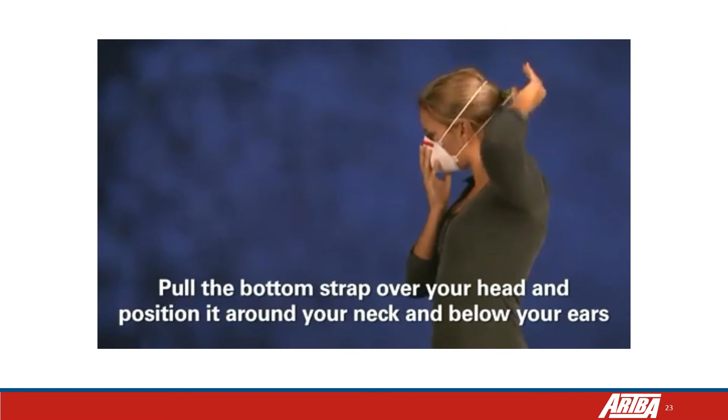Hold the top strap over your head, resting it high at the back of your head. Pull the bottom strap over your head and position it around your neck and below your ears. Be sure not to crisscross the straps. Make sure that your mouth and nose are covered by the respirator.

If the nose piece has a metal strip, use both hands to mold it to conform to the shape of your nose by pushing inward while moving your fingertips down along both sides of the nose piece. Next, conduct a user seal check.

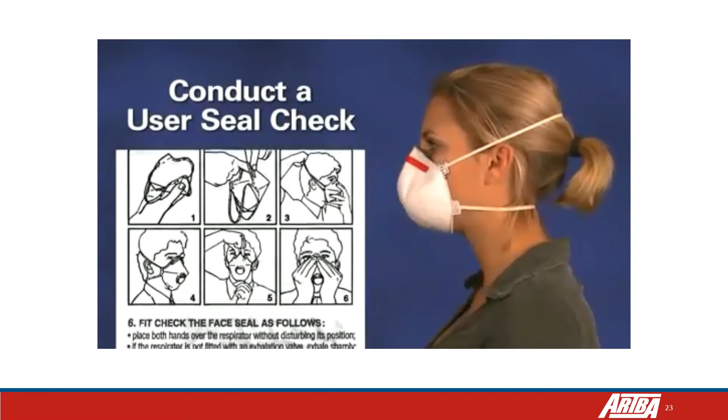It's essential to follow the manufacturer's user seal check instructions because the manufacturer knows the best method for checking their respirator. Generally speaking, the manufacturer's instructions are based on covering the surface of the respirator, usually with your hands, so that air is prevented from passing through the filtering facepiece.

A positive pressure seal check is performed by gently exhaling to see if the facepiece bulges slightly. For a negative pressure seal check, take a quick deep breath to see if the facepiece collapses slightly. During either test, if air leaks out between your face and the respirator's face seal, the respirator may not fit your face properly. One way to identify leakage is if you feel air blowing through the seal onto your face or eyes. If you feel leakage, readjust the fit of your respirator and check the seal again.

If you cannot achieve a proper seal, you are not protected and should not enter a hazardous area. See your supervisor to determine what the problem may be.

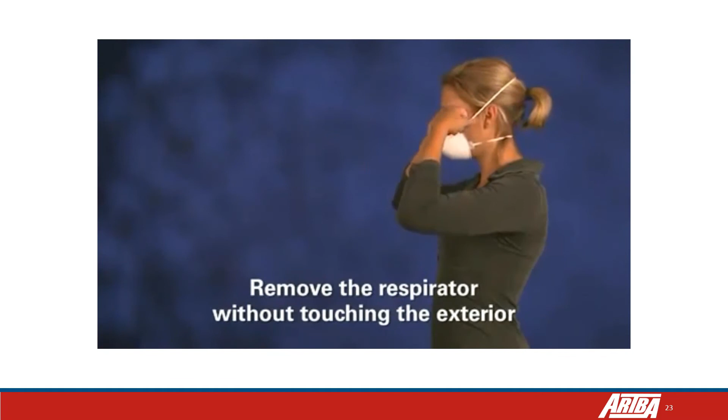When you're finished wearing the respirator, carefully remove it without touching the exterior, because the exterior may be contaminated. Discard your respirator according to your company's procedures.

Now let's explore the general instructions for properly donning and doffing and conducting a user seal check for a half facepiece elastomeric respirator, sometimes referred to as a half mask. Remember, these are just general instructions. You should always follow the manufacturer's instructions for the specific respirator model that you are using.

To begin, inspect the respirator, including the straps, valves, and gaskets, for loose, missing, or damaged parts. If you find any damage, repair or replace it. Then pull the bottom strap over your head. Place the respirator facepiece under your chin and over your nose, with the narrow part of the facepiece over your nose.

Pull the head harness over the crown of your head and adjust its placement until it is stable but comfortable. Be sure that the neck strap is flat and smooth against the back of your neck. Adjust the neck strap, but be careful not to over-tighten the respirator to your face.

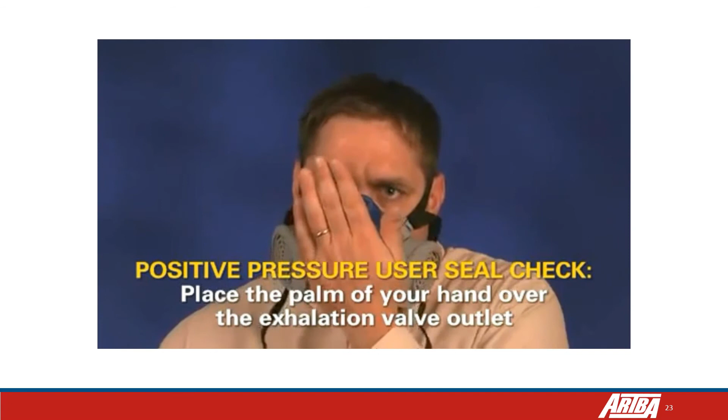Next, perform a positive pressure user seal check. Place the palm of your hand over the exhalation valve outlet. Do not push so hard that you distort the natural shape of the facepiece. Exhale gently and hold your breath to create and maintain a slight positive pressure inside the facepiece.

If the facepiece bulges slightly and no air leaks are detected between your face and the facepiece, a proper fit has been achieved. If, on the other hand, you detect a face seal leakage, reposition the facepiece and readjust the straps, and then retest. If you cannot achieve a proper seal, you are not protected and should not enter a hazardous area. See your supervisor to determine what the problem may be.

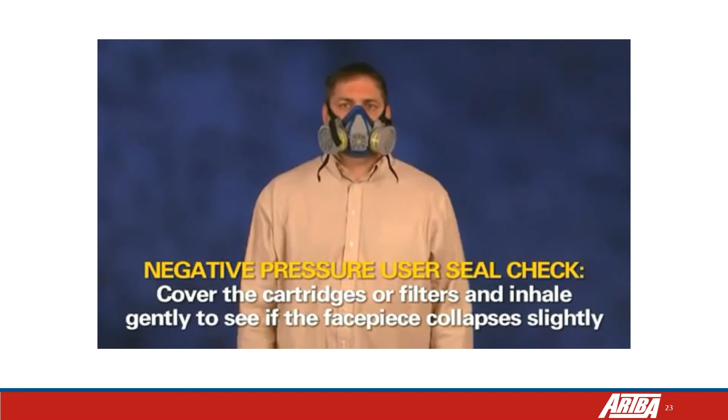Next, perform the negative pressure seal check. Cover the respirator cartridges or filters with the palms of your hands. Inhale gently. If you feel the facepiece collapse slightly and pull closer to your face with no leaks between the face and facepiece, a proper seal has been made.

If you detect face seal air leakage, reposition the respirator on your face and readjust the straps, then recheck. If you cannot achieve a proper seal, you are not protected and should not enter a hazardous area. See your supervisor to determine what the problem may be.

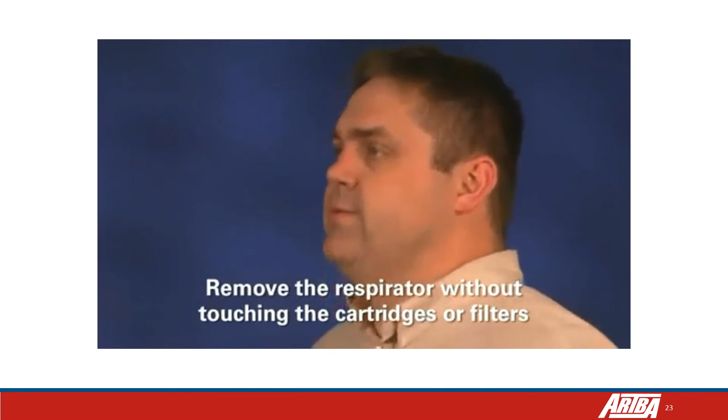When you have finished wearing the respirator, carefully remove it by loosening the straps and taking it off without touching the cartridges or filters, because they may be contaminated. Follow your company's procedures for maintenance of the respirator, including proper cleaning, disinfecting, and storage.

Remember, respirators must be used in the context of a comprehensive respiratory protection program, according to OSHA Standard 29 CFR 1910.134. For additional information on respiratory protection in the workplace, consult this website.

So we have learned in this module all the control methods that we can use to protect our workers. Tomorrow we are going to continue with this presentation, learning how we can use Table 1 in combination with all these methods that we were using. So that is it for today.

Do we have any question, Paula? Yes, we do have one that came in. It's, can you use the handheld concrete saw that has no integrated water delivery system or vacuum?

Yes, you can use a spray method. You can have somebody else spraying water on this area, for example. Maybe they don't have the spray system or hose or vacuum system attached, but you can have somebody else providing you, for example, water on the point of contact, spraying some water with a water pump. So you will need another worker helping you to do the task. That's an alternative.